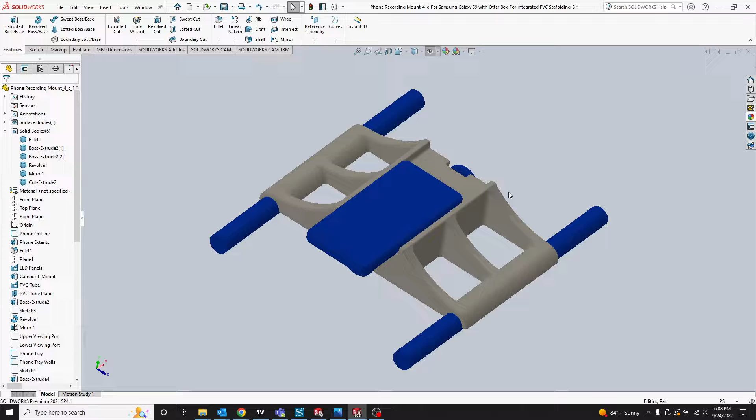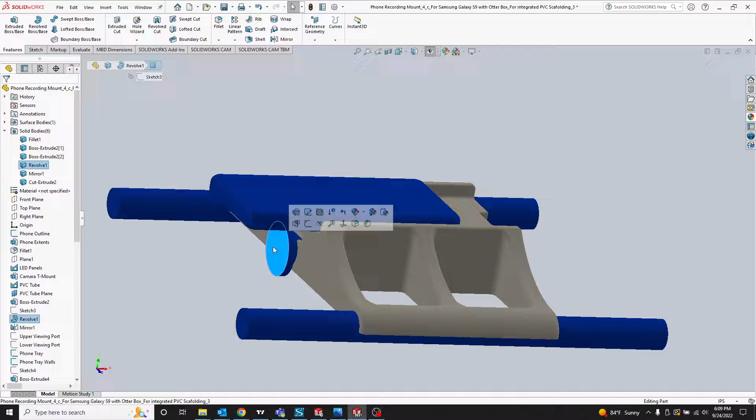So first of all, what is this? Well, this is just a recording mount for the other types of recordings that I do. These right here are just half-inch Schedule 40 PVC. I have a frame already built, and I want to be able to hold my phone in a centered position. And these, I didn't model everything, but these are basically LED mounts.

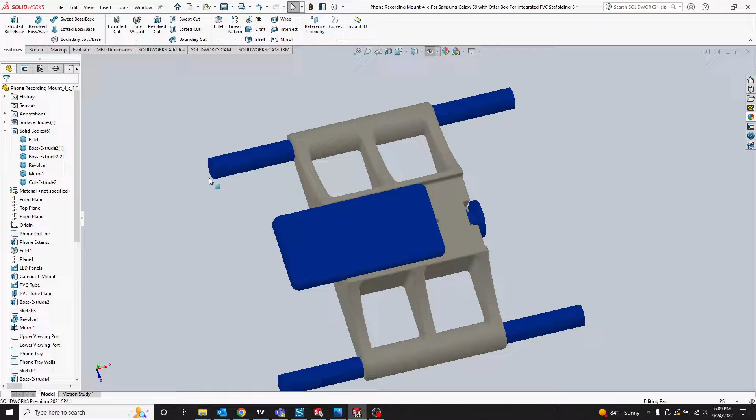Let me show you the outline of those real quick. Where'd they go? There they are. Yeah, so that's basically how big they are. They're panel lights that give diffuse, non-spotlight type of light that doesn't give off a bunch of glare. So that's the point of this.

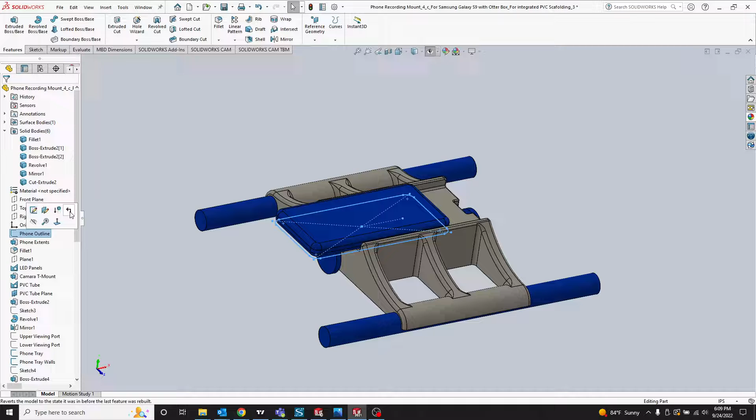That's what I'm doing. So let's start from the beginning and show you the history in this CAD file of exactly how I arrived at this, because it's pretty methodical at this point. 12 years, well, if you include college, more, that I've been doing this. And at this point, I pretty much have a process down that puts my creativity into a nice little controlled package, to save time and to make designs better in the long run. So let's go through that.

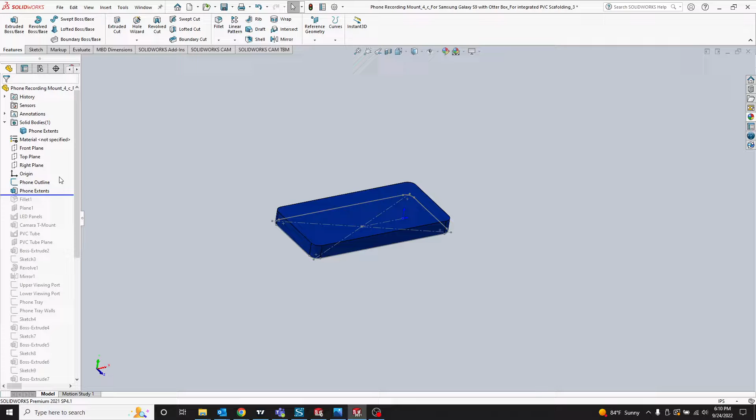All right, so what you start with makes so much difference. And so I know I'm going to use my phone for recording. So why don't I go ahead and start with what I know? That's my phone. And I can move it up and down with various tricks if I want to, but I know I want my phone to be on there. So why don't I start with that information?

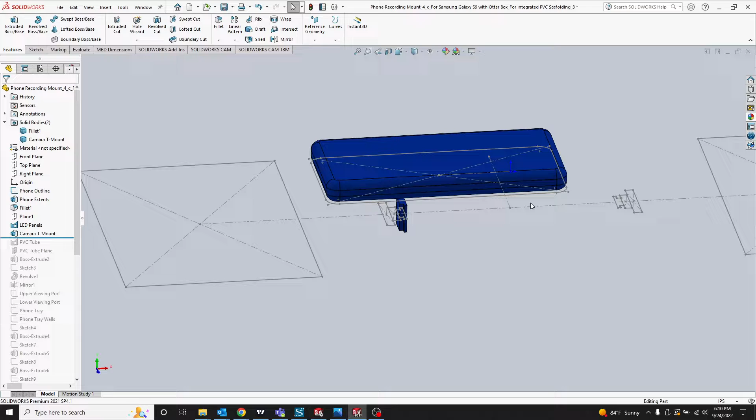Then next thing, I know I want the LEDs to be there. They have a specific kind of camera mount. I know roughly where I want them to be in relation to the phone. Again, the mount doesn't matter right now. The mount is what's going to allow me to accomplish these objectives. So I don't need to start drawing the mount yet. I need to start drawing the requirements that the mount needs to adhere to. So I can just suspend them in space. It's the beauty of virtual design.

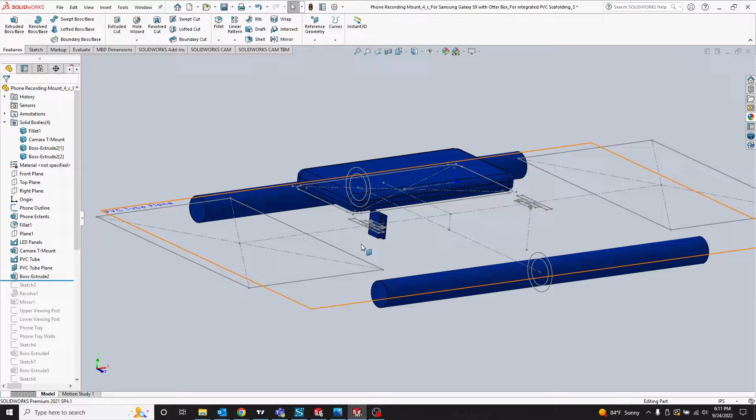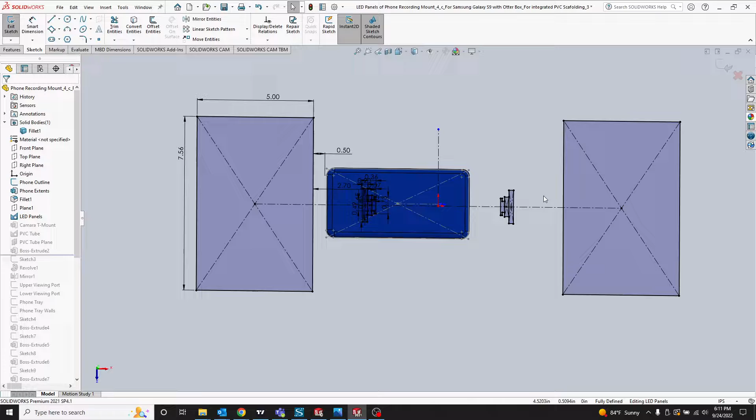So that's basically everything now. I didn't, if it's something that's complicated to model, I don't waste time doing it. I just model the dimensions that matter. So in this case, this is a sketch for those of you who aren't that familiar with CAD. Oh, wrong sketch. Where's it at? LED panels. I named it. Maybe if I just look at my damn labels. So that's all I did. Got that with calipers straight off of the parts that I ordered from Amazon.

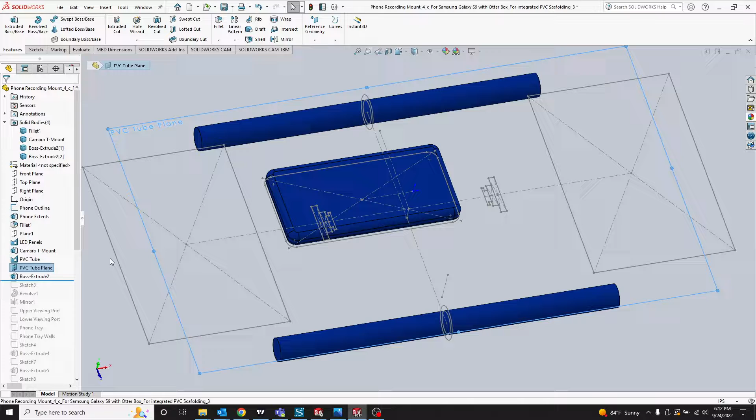So haven't even begun, and you can see I have a non-negligible amount of work in my feature tree. Of course, it's fairly quick. The more you use whatever particular platform you use, whether it's SolidWorks, AutoCAD, or Solid Edge, or I'm probably missing a couple of big names right now, but anyway, I'm using SolidWorks and I'm pretty fast at it. So this really doesn't amount to a lot of time, and it means that whatever I do from here on out, it can't be wrong unless my assumptions are wrong.

And basically, the location of these things, these are all my assumptions, and so now I've limited my creativity to only those things that accomplish the specific goal that I'm trying to accomplish, as opposed to if you go in there and just start drawing the geometry that you think you want, then when you got it wrong because you kind of jumped into it too quickly, it's really hard to go back and make changes.

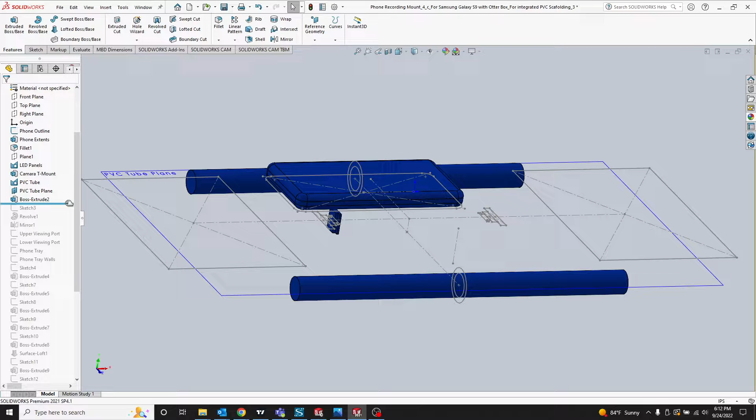But if you have your assumptions modeled in there, then you can go right high up in the tree that doesn't hurt farther down in your tree, and you can go and make changes. And most of the time, your geometry all down here will automatically update to your changes.

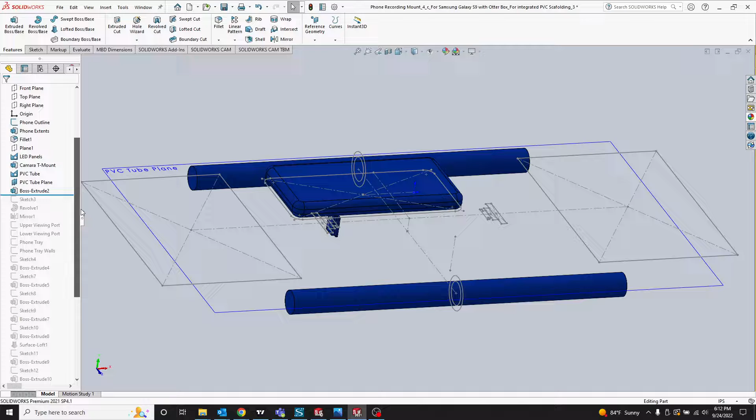So if I just wanted to move my phone a little bit lower in relation to, see, now it's not as high up above the scaffolding that I have.

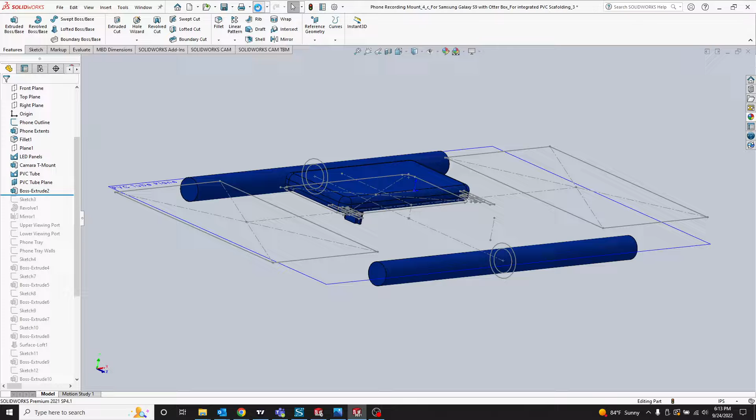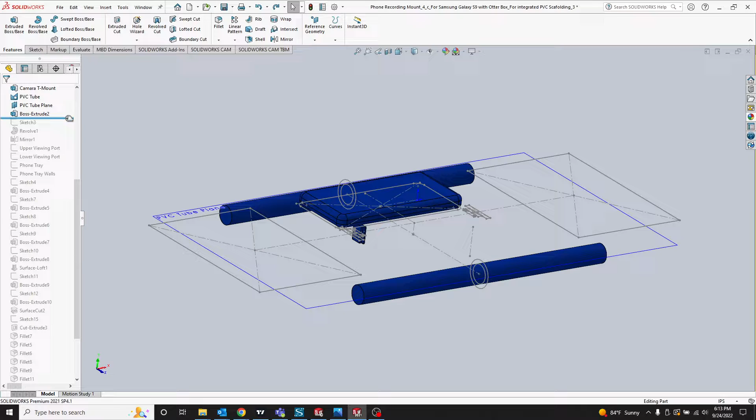Let me show you the difference real quick. See, it's that easy, and there'll be some minor errors, but if you use this geometry to create the geometry of your part, then it probably won't get confused. You only have to change some errors. This is specific to CAD and how virtual design software works, which is a major consideration if you're using it.

Oh, I wasn't quite done. Those are the tightening nuts for this specific type of camera mount, which matter because if I tried to model the phone without modeling those, I'd be putting the phone somewhere here, and the parts I have wouldn't even fit, and I'd have to start all over again.

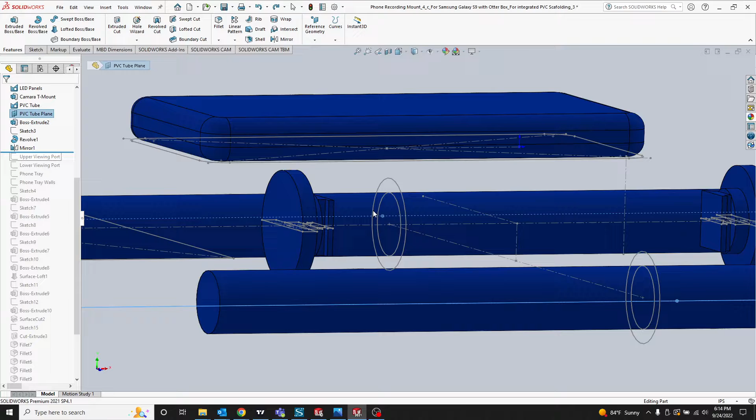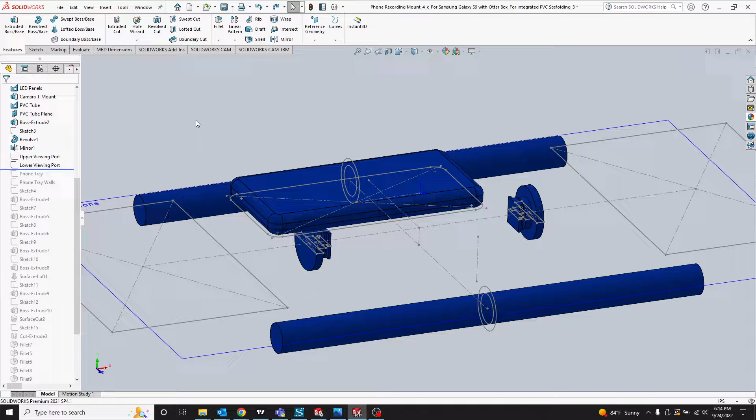This is specifically designed for 3D printing, so that's the manufacturing process. Normally you have to really take that into account. That's probably the biggest thing to consider when doing conceptual mechanical part design—you have to have an intimate familiarity with the manufacturing processes, so you don't make geometry that's not possible to make. But the beautiful thing about 3D printing is there's really no geometry it can't make.

It depends on how easy you want it to be, which becomes an art in itself—designing things for ease of 3D printing. But there's not a whole lot of limitations there. It's just about how easy you want it to be.

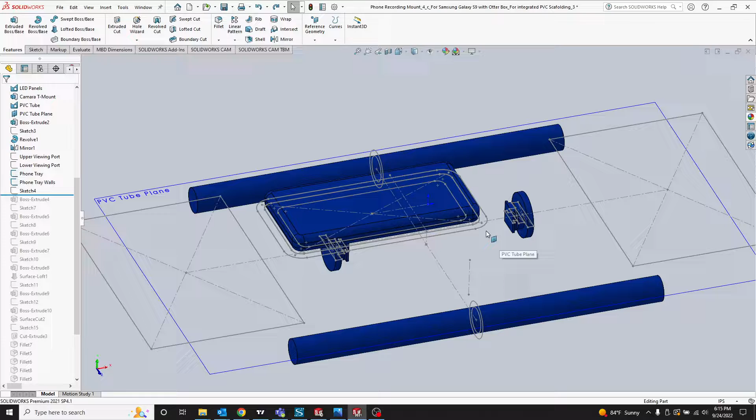So some more sketches that turned out to be... yep, there. Okay, so that's where I started to draw the actual part that I want to print. That's why it's in gray and not blue. So you might say, well, that's a weird way to start.

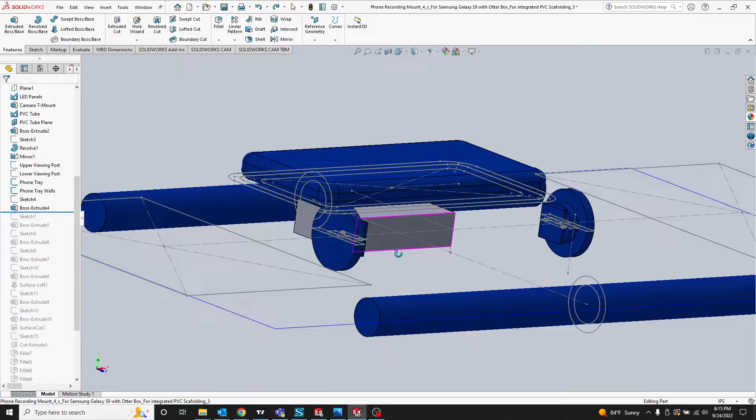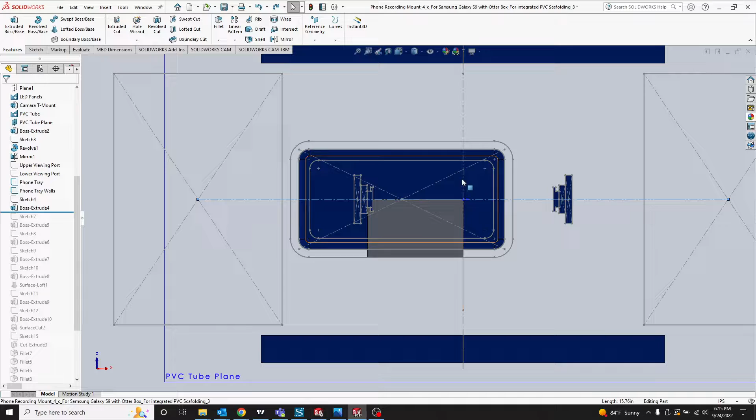I've divided this part up into quadrants because I know I'm intending it to be symmetric about this axis and about this axis. So instead of drawing all this detail two or four times, I'm just going to draw it once and then mirror it over to here and then mirror it over to here. I already have that plan in mind, so I know I don't have to waste time drawing stuff that I'm just going to duplicate.

So what did I do? Okay, so then I put the floor. That's the body of it, the basic body, with the mount in there. I know that I want that to be there. And then I put a floor in so it can't fall out.

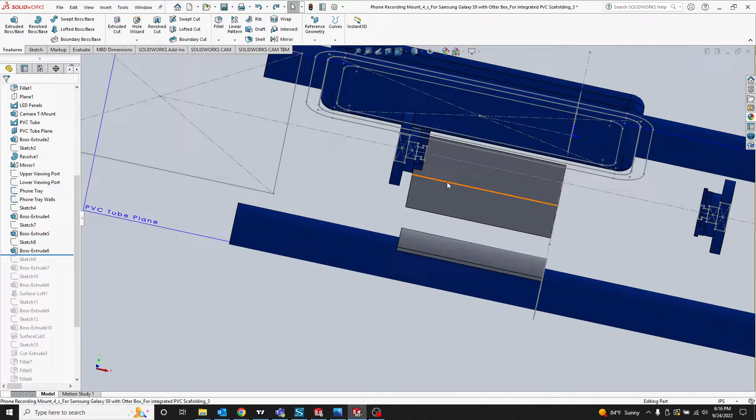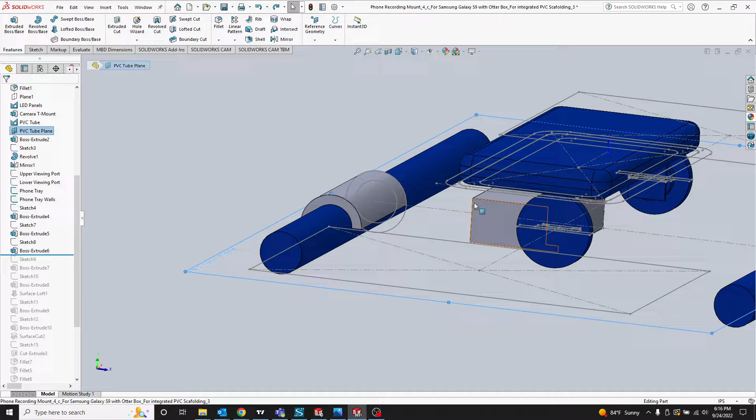Again, this is another kind of possibly non-intuitive way of going about it. You would have thought I would have drawn some kind of support to connect these things first, but why? I know I have this requirement here, so why don't I just put that geometry in? Again, the beauty of virtual design—you can just suspend things in midair. You don't have to work from the outside in or from the top down. You can work from a conceptual logic tree.

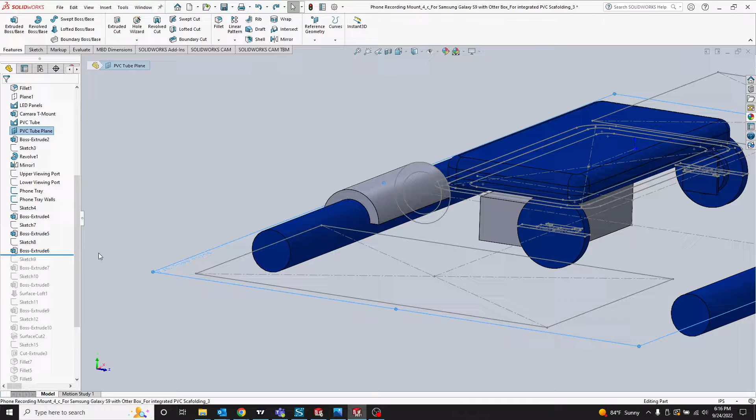You can work from the basics and build from there, building a logical tree instead of worrying about physical constraints. I know I want that to be there because I want the part to rest on the PVC supports. Then I make a connection, and I just decided, well, that looks like plenty of support. And then how thick should it be?

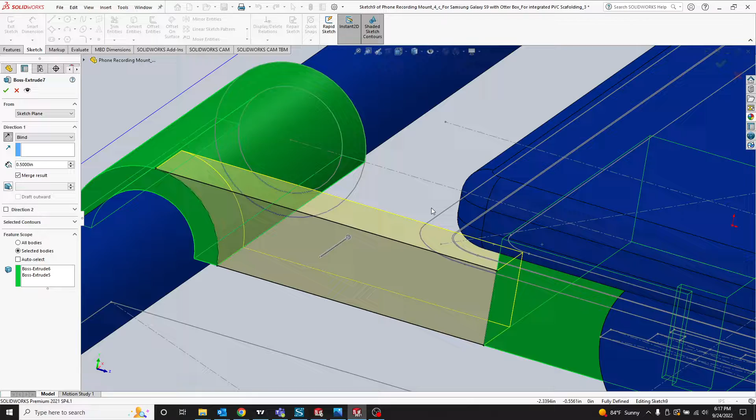It's going to be 3D printed, with maybe 20-30% fill, so the density of the material is actually 20 or 30% less dense than if it was a solid part, like injection molded or board or something like that. So yeah, I'm going to make it half an inch.

It's really easy to make stuff strong that has wide walls. So if you have the ability to hollow something out, you would never not make something as big as you possibly can, or as thick as you possibly can, because the outer skin of a part is basically where the majority of the load bearing capability comes from.

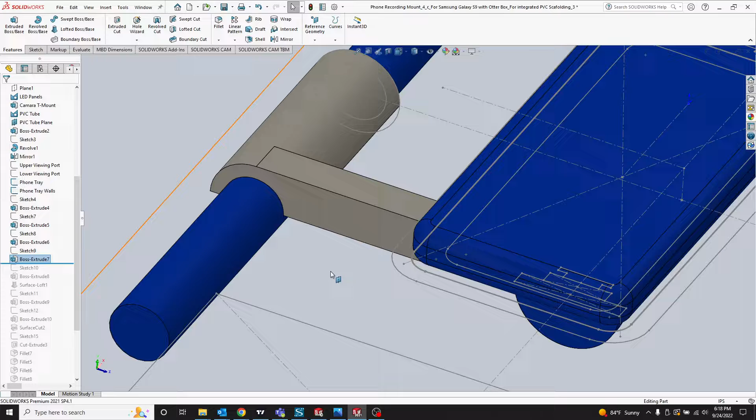Take, for example, a drive shaft. A drive shaft can handle the torque of a Cummins Duramax diesel, like 2,000 foot-pounds, with a wall thickness of probably less than 1/8 of an inch, just because they make it hollow and make the diameter really big. So they spread out that torque on the outer skin.

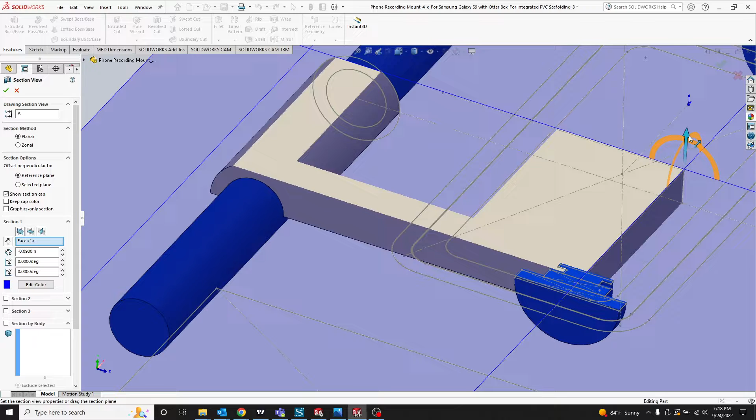3D printing is very similar to that—it's the magical ability of technology that you can choose the infill and even the pattern that goes on inside this cross section. If I was to make a cross section of this part after it was 3D printed, you would see all the overlapping cavities and whatnot.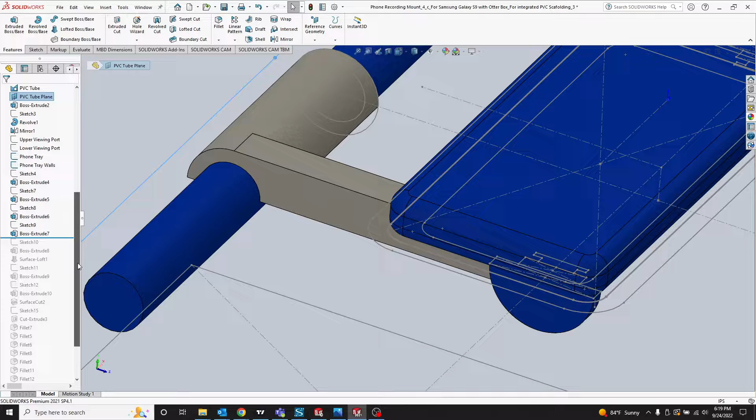Thickness is not your enemy in 3D printing. It is very much your enemy in almost every other form of manufacturing, particularly tooled manufacturing, like casting and injection molding. That's a bit of a sidebar, but these are things that go on in my head as I'm designing, that have become second nature because I did them for so long.

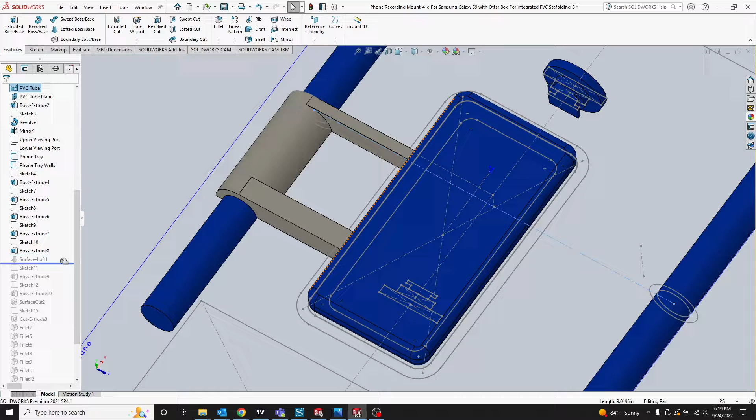Then there's the middle support. Notice it's half the thickness because I'm going to mirror about this axis, so I don't need it to be. I want it to be the same thickness when I'm done. This is a kind of a weird way of doing this, but it's the one I thought would be the most robust from a CAD modeling standpoint. If I change the design, I know this won't ever change.

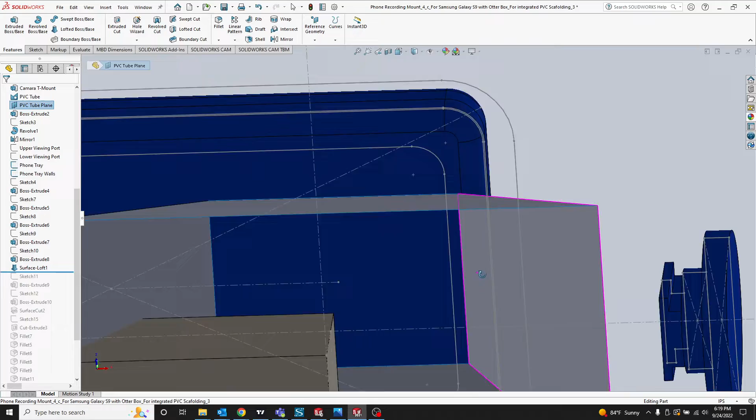This is a surface, I just inserted a surface. It has zero effective thickness, really, it's virtual, something you can only do in virtual design. It's just a virtual, infinitely thin surface, and that is basically the camera. The camera on the phone is right there, and that's a viewing angle. You notice there's still something blocking it - that's a little tool we're going to use later.

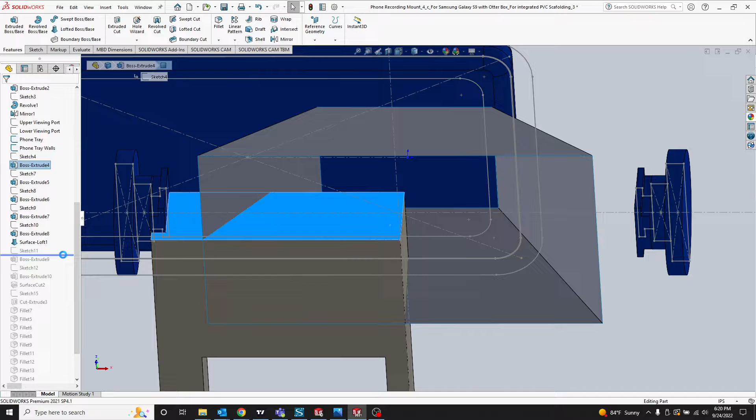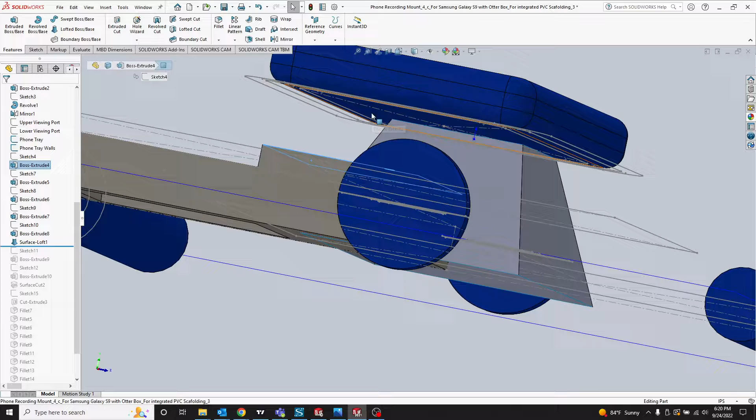Let's go down, let's see what's that. Okay, so that was, you can see, I modeled how thick I thought it needed to be. Really, in retrospect, I could have just modeled this up to here from the beginning. I know that I want to support the phone anyway, so why didn't I just do that way over here in this thing? A lot of times the limitations of your own mind mean you don't become aware of things until it's glaring, further on in the design.

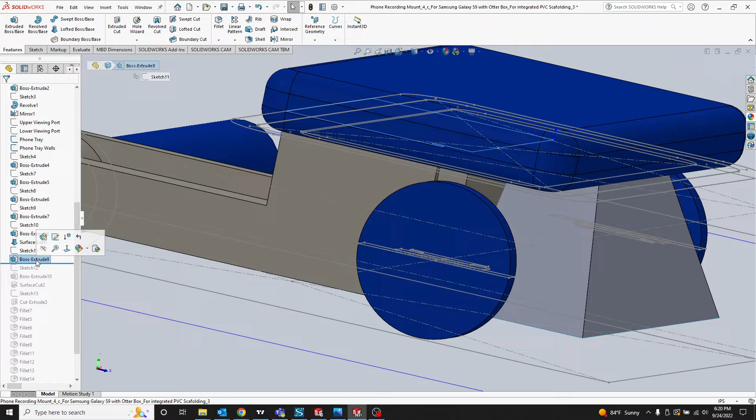A little not the best conceptual design, because technically I knew that information up here in the tree, and so I didn't need to wait to put that in there. There was no reason to, but nobody's perfect.

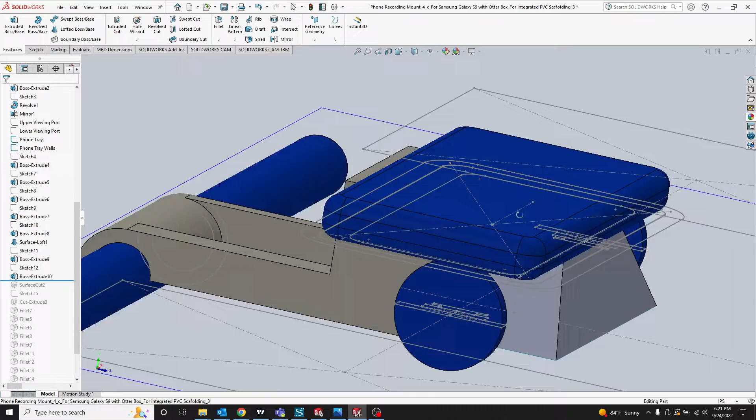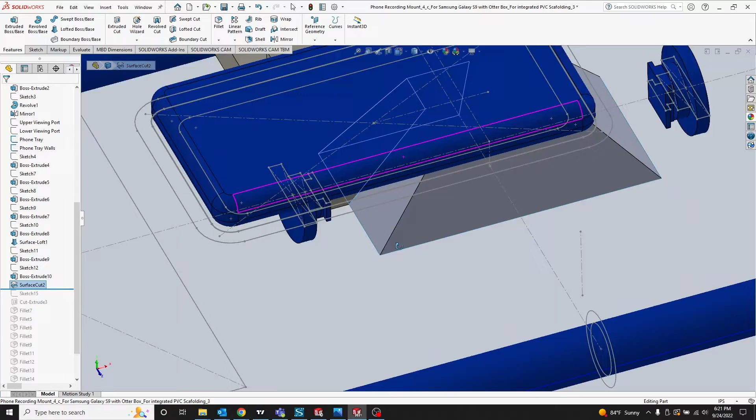So now I know that I want the phone to be constrained and aligned, so that I'm not taking a crooked picture - it's repeatable every time I put it in there. So a nice big lip there for the phone, and then I'm not sure why I did that after, put the surface up here and then did it up here, but there's a lot of freedom in virtual design and where you put things. You get the same result.

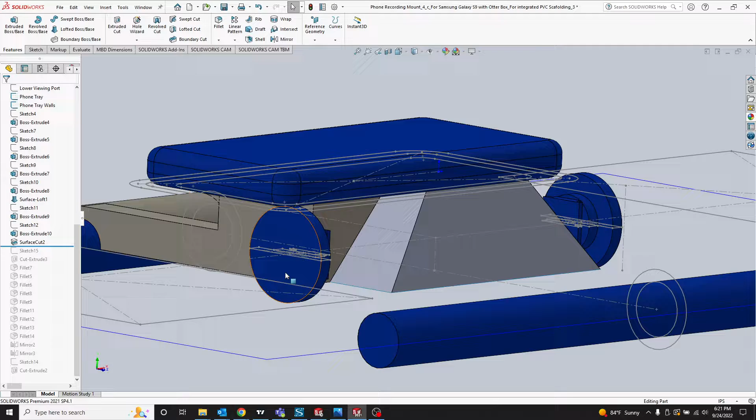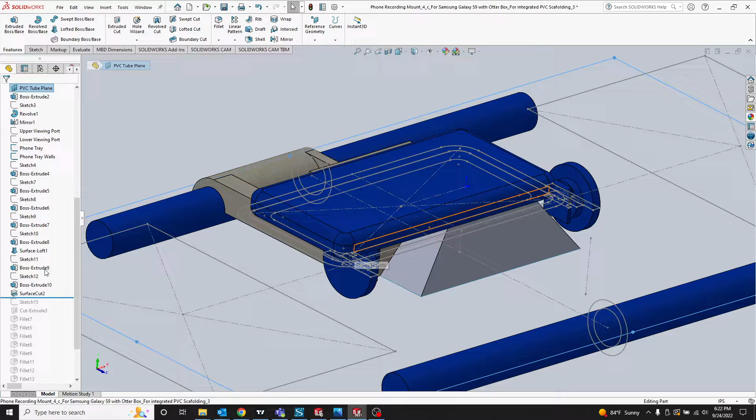But so far, the only inefficiency that I see in my process here was really that one I just mentioned, with that feature that extended up to here. I could have removed that feature, but so far I haven't wasted much time in making this. It's very straight to the point. I didn't have to make a bunch of bosses on top of bosses on top of bosses, because I already have all my information out here. Why would I make a feature that could be one or two features by using five or six features? If I already know the information, then just go straight to the end.

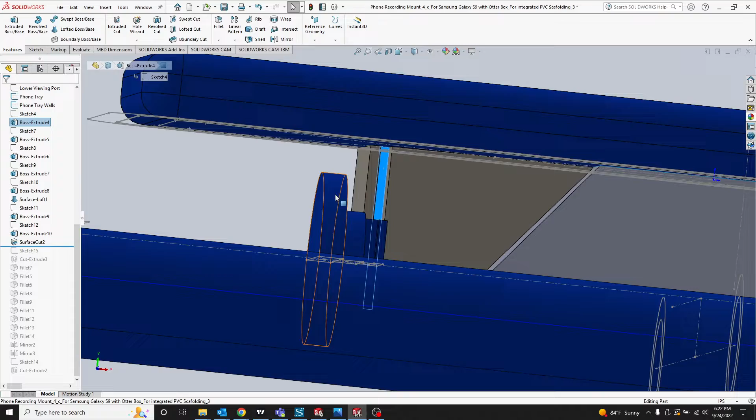And then that cut, let's see, what is that? Oh, that's just a little - I don't want, if it's tight, I don't want to have to be pounding that camera mount all the way down through these little features. 3D prints tend to be inflated a little bit or oversized - holes are smaller, bosses are bigger - and so I try to account for that, five to ten thou. It depends on the layer thickness and the material and the printer and whatnot, but I try to account for it.

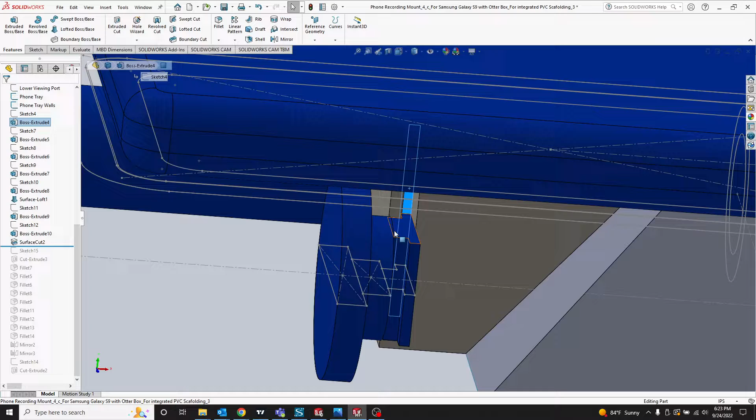But I still don't want - that material is really not doing anything for me being there anyway. So if it does turn out that the 3D print is snug, then why would I bother having to force this thing down through all of this T-slot? Just get rid of it, make life easier on myself.

All right, now we are to the fun part, which is where you get to make it look sexy. Again, the part would work just fine looking like this. Again, this is just a quarter. So let me see.

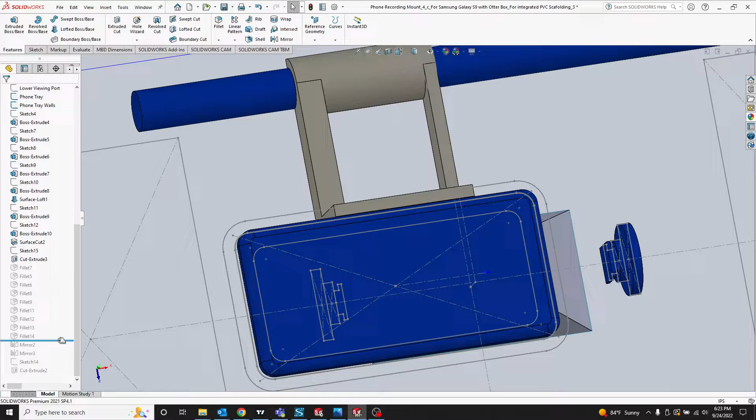Close your eyes, close your eyes. Don't watch, you don't look at the - you can't see this till the end. Don't look, wait. Okay, so this is what the part could look like.

You can open your eyes now, by the way. This is what the part could look like. It'd be perfectly fine, there's nothing wrong with it. It's not like it's carrying a heavy load, but I just can't help myself, I have to make things look sexy. It's half the fun of having a virtual, powerful software like this - you can just make things look sexy in a matter of seconds.

So, all right, now you can see the stuff that I'm sure you didn't see because you had your eyes closed.

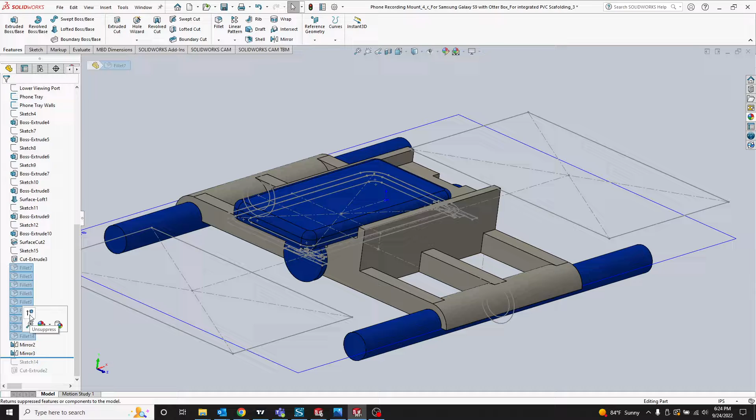Unsuppress. Let's go, let's just work our way down. That's an obvious failure point right there if I was designing this to carry a big load. It's a sharp edge, which is just a place that cracks can propagate.

The load, this is the support. The support surface is right here. So the stress on this part is just getting bigger and bigger and bigger. Why would I want this thing to be the same height all the way out? It has low stress here and high stress here, so that's just a bad design.

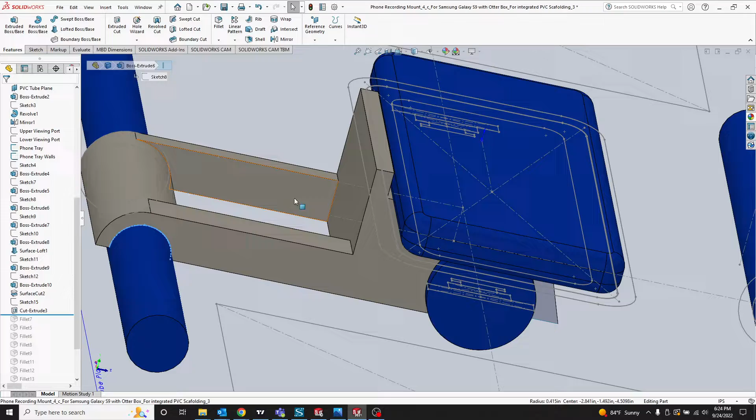I'm probably wasting material here, and I don't have enough material here. So I could make it equally strong based off of the load profile.

Again, let's look at it. This is a quick little statics lesson. The load is being applied right down here, right there - that's a quick little arrow. That's where the load is, and this is where the support is. So the material here is doing very little, and then the farther you get, the closer you get to the load, the farther away from the support, the more load that the local material is having to take.

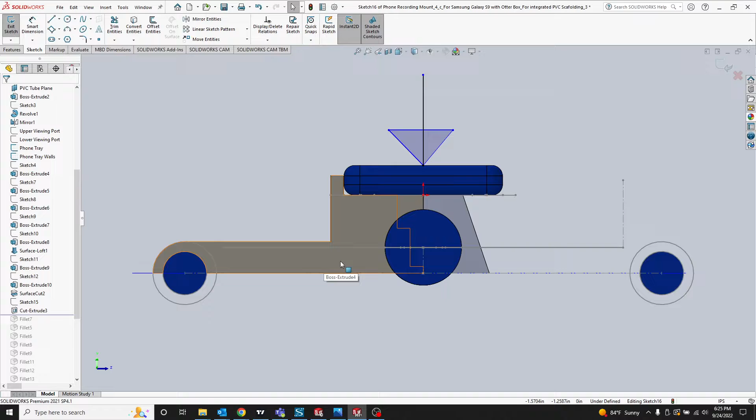So, something that makes it look sexy and solves that problem. Nope, not that one - that one. Boom. Then there's no weak point in this now.

If it breaks, it's just going to be the bulk strength of the material that's not sufficient - it won't have any weak points in it. Again, mostly doesn't matter for the purposes of this part, but why not? That's all going to be hollow anyway, so it's not like it's even using that much more material.

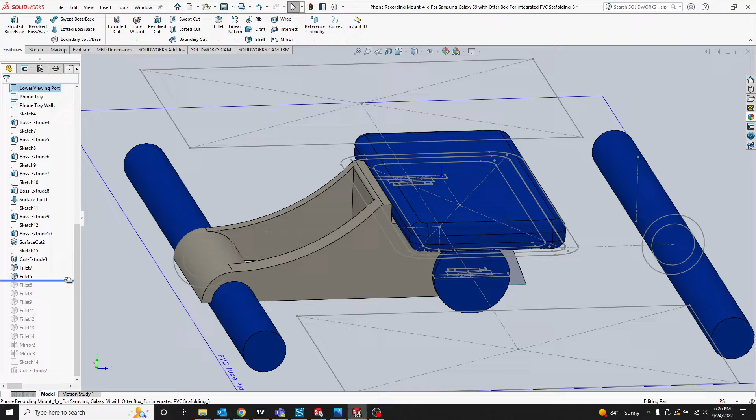And then some of this, again, is purely aesthetic - that versus that, boom, boom. All right, what do we got there? Yep, couldn't have those sharp edges.

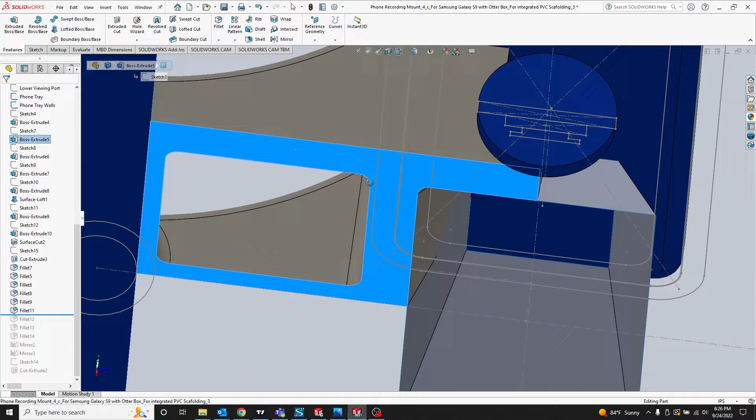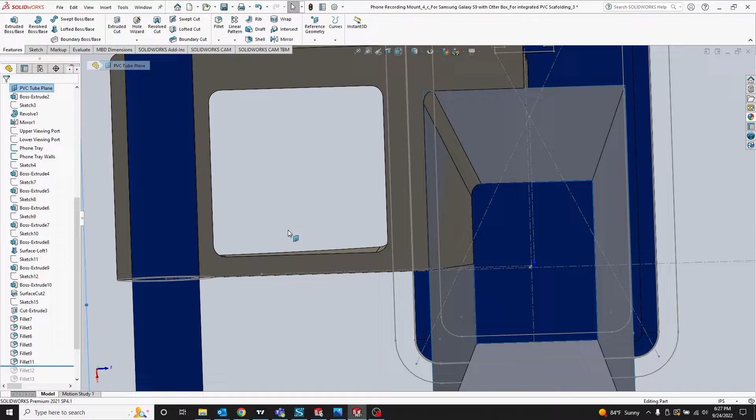Another thing to take into consideration: I will not be filleting these surfaces. Why? Because that's the build plate surface. The more contact you have in general with the build surface on a 3D print, the better - the more robust the print is, the less likelihood it has of messing up or coming unstuck. You can go overboard, and if you have too much area it'll actually warp the print, but I don't think this one is in danger of that with this big open space I have here.

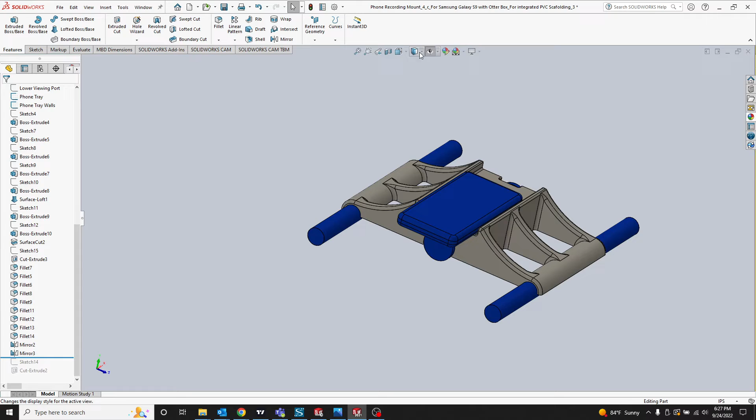So not putting any fillets there, and fillets are easy to make as long as they're on the upper or side build surfaces of a 3D print. I'll just skip through these, they're not too consequential. And then, boom, let's make it look pretty. Let's make it look pretty. Yeah, real view, and oh, look at that. Look at that. And then, so that's it kind of in use.

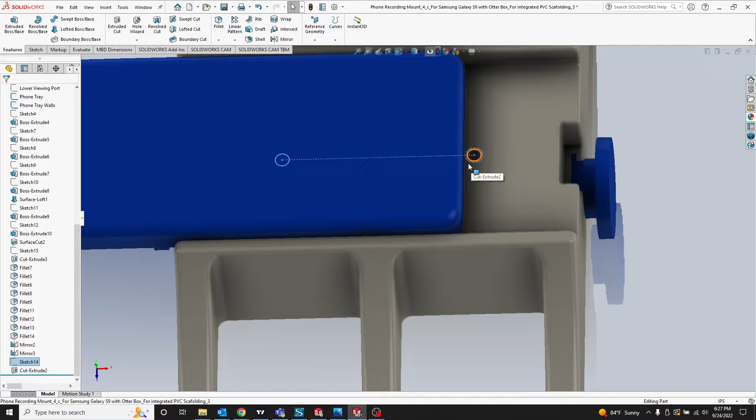And then I did add these holes after the fact, just thought about it for putting a little screw in to stop the phone, so I can have the phone be either in this orientation or over here in that orientation. With the holes, if I put a screw in here, it'll bump up against this one in this configuration, and if I put one right here, it'll bump up against that one in the opposite configuration. So that's why I put that there.

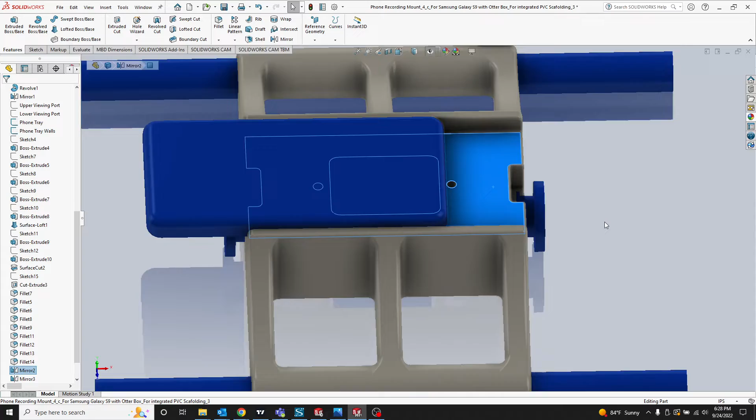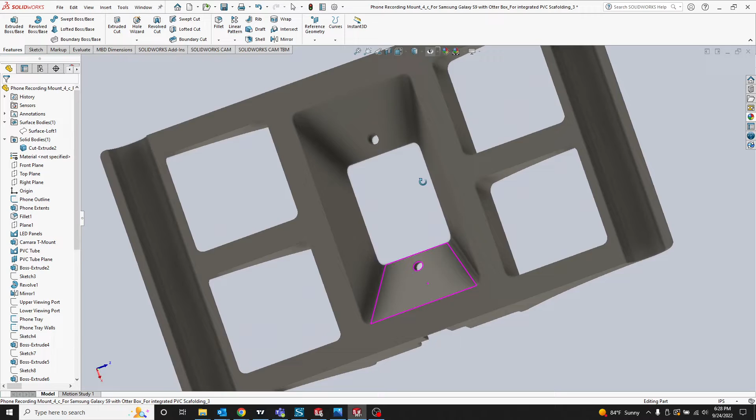But there it is. And then let me remove the parts that will not be printed, and boom, there it is. Let's get rid of that surface too - that's annoying. Yeah, there we go. There is the beauty that is a part that will never need to do anything important.

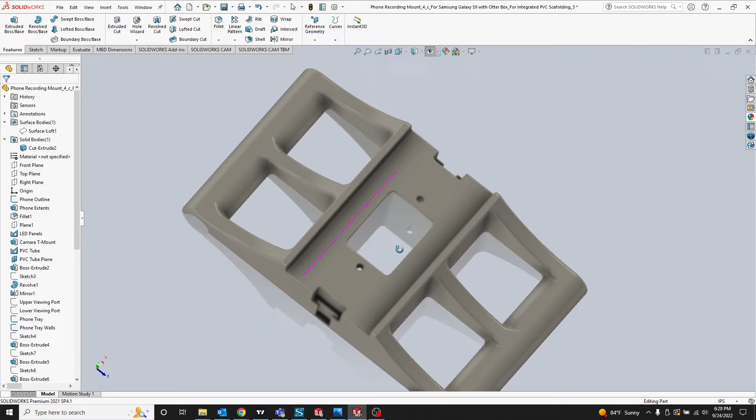But it was fun. It was fun, and it's cool to me. It's cool to design things based off of requirements, and it's kind of fun, the challenge of meeting those requirements in an efficient and functional manner.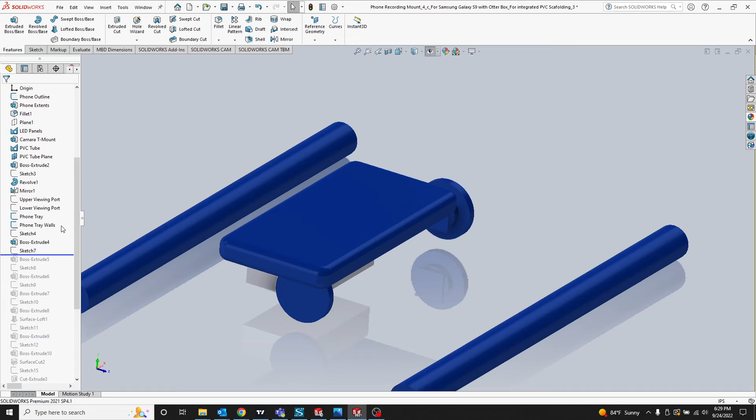And also, most importantly, what this whole video is about is not taking a lot of time to do it - doing it in a way that maximizes your time and your value, both for your own purposes, or in a professional capacity for a company you work for or whatnot. Doing a good job quickly is obviously better than the alternative.